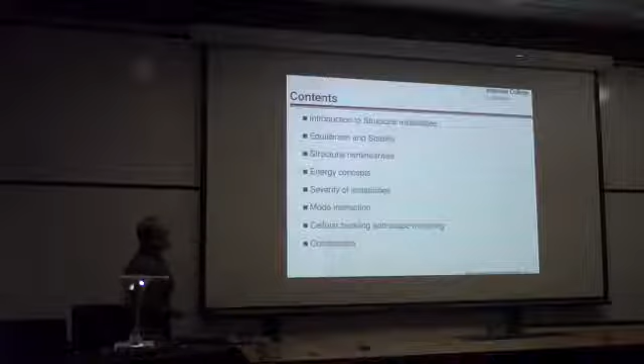So what I'm going to talk about: I'll give a brief introduction to structural instability, some examples, then we'll talk a little about equilibrium and stability. I'll try to keep the equations to an absolute minimum, so it's the facts of the talk that are important, not really the mathematics. It's also about structural nonlinearities, which are key to understanding these behaviours and where they arise from.

We'll discuss some energy concepts, talk about severity of instabilities, and then a little about how instabilities interact. Then we'll focus on some research topics - cellular buckling and shape morphing - and conclude.

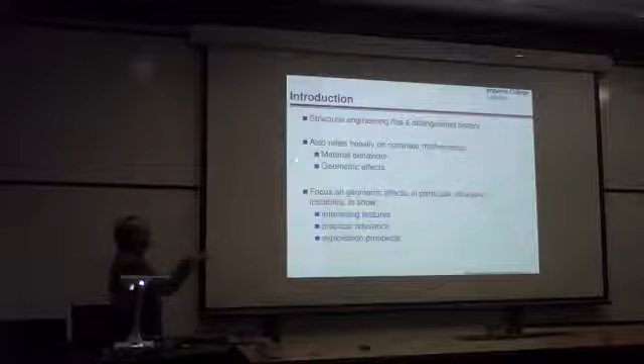Structural engineering has a distinguished history in its own right - it's a subject with its own literature, and we're working in a building right now, which is a testament to it. But it also relies heavily on nonlinear maths. The nonlinearities come from either material behaviour or geometric behaviour - when we talk about geometric behaviour, we mean things that deflect a long way. I'm going to discuss geometric effects today.

I will talk about material behaviour a little bit too, just to define it, but we'll mainly focus on geometric effects, particularly structural instability, which shows interesting features, practical relevance, and prospects of being exploited to your advantage.

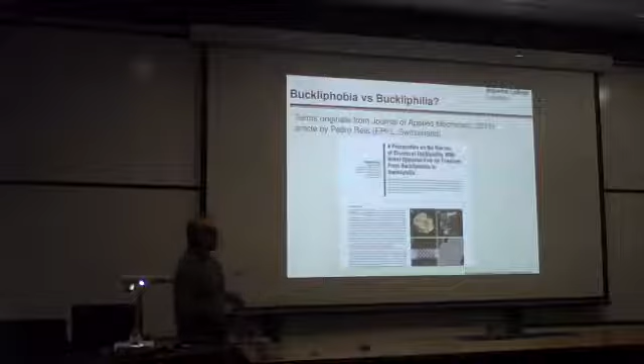So, Buckliphobia versus buckliphilia - I can't claim that title is original. I borrowed it from Pedro Reis at EPFL in Switzerland, who wrote a nice paper about 3 years ago in the Journal of Applied Mechanics, discussing applications where buckling is used to enhance behaviour. He's looking more at soft matter materials and shape morphing applications, not structural engineering, but at the small scale, where deformation from instability gives you something advantageous in practice.

So let's look at a classical example of instability. If you're a structural engineer, this is the first thing you look at - a column. There are plenty of columns in this room, you can see one there - probably can't see many more because they're not exposed, but there's definitely one there, supporting the building under compression. That one's probably concrete, but structural instability concerns things that tend to be quite slender and thin, like steel, which normally has much less volume than concrete because it's much more expensive.

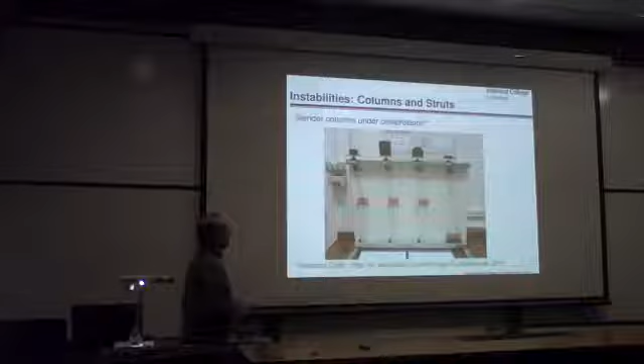But it's also much more strong. Anyway, so here's some standard columns under compression. If you apply a force here, there's some metal weights applying compression to this strut, and this strut is buckled. You can see it moves sideways from the original position.

If we change the boundary conditions, we get a different type of behavior. We actually get more load on the top there. I think this one has a clamp condition at the end here, where it can't rotate, but it can rotate here. So that gives you slightly more load than this one, but less than that one. And then if we have a cantilever, which is free at one end, see this can slide here, then it can only take a very small amount of load

Before it actually collapses. Those of you who travel by train, this probably doesn't happen in the UK very often, although it probably clearly does because it's a good excuse.

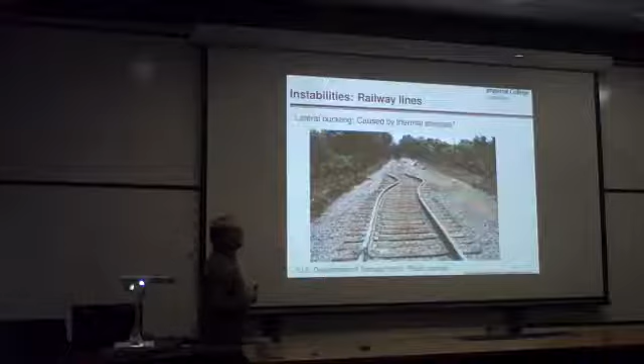But this is a type of buckling that occurs in railway lines where you get thermal expansion. Rails tend to be welded together these days. In the old days, they used to have expansion joints, but it's not very good for fatigue and things like that, so they weld them together. Normally they would put a big pretension in there before they place the rails, but if the pretension gets diminished over time, and you get a sudden heat gain, basically what happens is the rails try to expand. They can't expand because they're welded to the next rail, and they go into compression, and then they buckle.

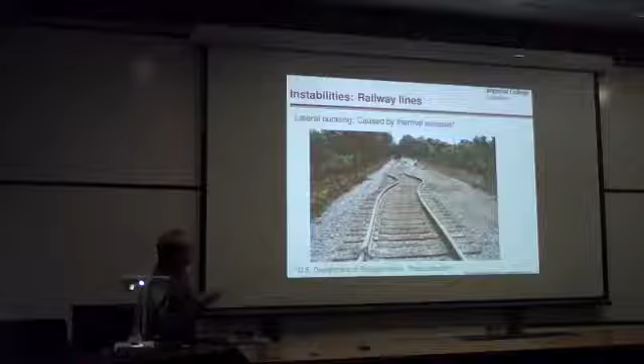But this is a sort of wood decking here, which has uplifted for the same reason as this one. In this case, it was allowed to move sideways. It was the easiest thing for the structure to do. In here, the decks can't actually move sideways because they're all clamped together. So the best thing that you can do is move upwards.

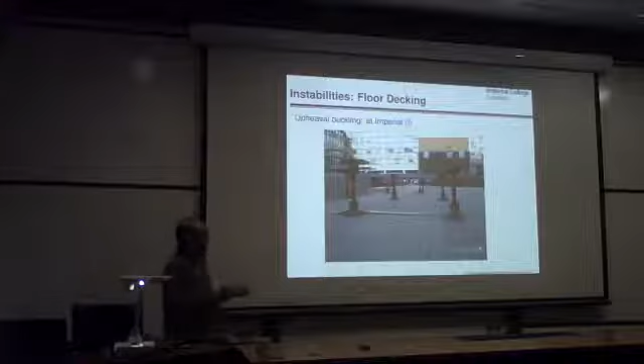So this was on a very hot day actually, in May 2005, quite a while ago now. It was about 32 degrees that day, but about 4 days before, about 8 degrees. So there was a lot of temperature change in a very short space of time. There's me with hair, a bit slender as well, probably, back in 2005. And just showing here, there's a little shadow of this tank here, and you can see that the distance of that is quite high, and these are large deflections.

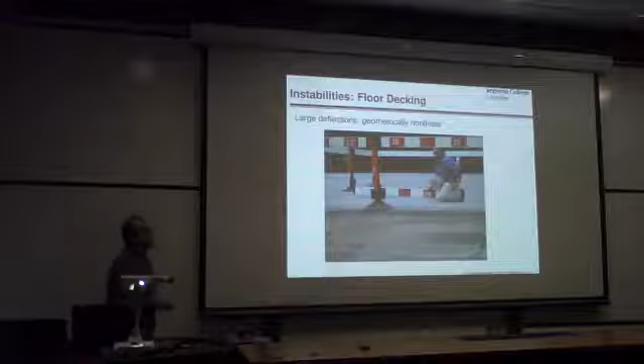Something in terms of these things, when we define it as large deflections, we think of deflections about the order of the element itself. So the decking elements would be about this deep as well, and you can see the deflection is quite of the same order. So it's called geometrically nonlinear. You can't make assumptions like sine theta is theta, and expect to get the same information that you would want if you wanted to model these large deflections.

Okay, so these were examples of very simple instabilities, but you can have simultaneous instabilities as well. I wanted to show you at least one video. I'll show you a few videos today. Let's see if this comes up. Let me just pause it for a second.

This is a video taken by me. This is a third-year project that our undergraduates do, where they have to build an aluminium beam and test for failure. It's a very simple setup. It's supported here, called a simply supported beam, which means it's resting here and it's resting over there. It's being pulled down here. So this chap here is turning this handle, which basically turns a screw, which pulls this down. There's a rod which is passed through the beam, and it just basically pulls it down.

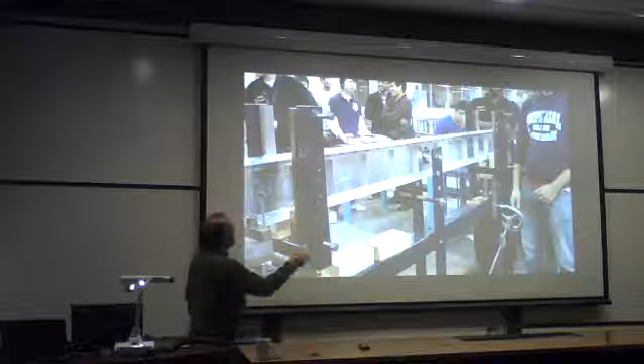It puts it under what we call three-point bending. There's a big point load coming in the middle there, and two reaction forces at the ends. These two points here and here stop the beam from displacing sideways, and the students are allowed to put that wherever they like. They're also given certain sizes of plate and angles and rivets to put it together and design to a particular load.

This wasn't a brilliant example, but they gave it a nice video. Okay, so he's about to apply the load, I'll just be quiet and keep watching this point here.

So when he applies the load, this thing will start to fall and this goes into compression. So you start seeing a natural sine wave coming in, or something which is a modulated sine wave.

Okay, and then what happens is the thing buckles, this buckles locally and then it buckles globally. So you'll see that it starts moving, starts twisting and dropping sideways. There, you can see, just pause it there.

Okay, so you can see that the back looks vertical, but this one is at an angle. You can see it's moved sideways as well. So this is an example of what we call mode interaction. I'll just play the thing again.

Okay, so in this case, the local buckling in the top flange there, the thin plate at the top there, then induces a global buckle into the main beam, and this is called mode interaction. It's a nonlinear interaction between the local buckling mode and what we call the global buckling mode, which in this case is a combination of lateral deflection and twisting.

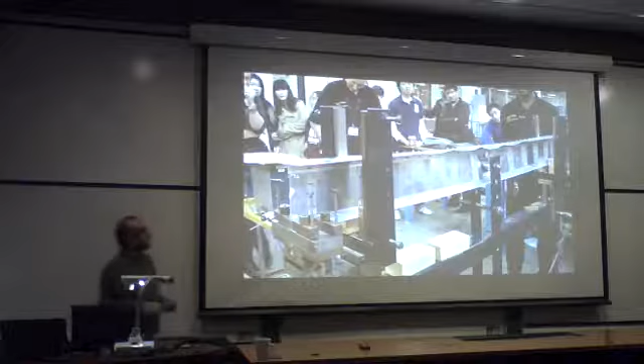Okay, so the global mode was lateral torsional buckling, which appeared at the end. Plate buckling occurred at the beginning. This is what we call local buckling as well. And this is an example of mode interaction. We'll return to a similar problem later when we look at some actual work that we've done at Imperial.

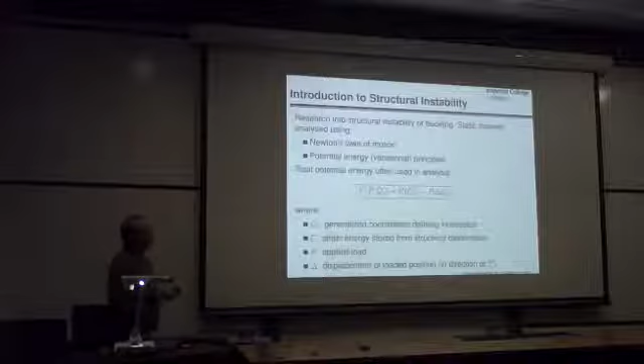So, what we're going to describe is research into structures with buckling. Static systems are analysed. We can analyze it from Newton's laws of motion, or we can actually, what we tend to prefer in structural systems problems, is to use variational principles or potential energy principles. It's a static problem.

So potential energy is often used in analysis. Here's total potential energy. It's a function of two things in this case: the applied loading and the generalized coordinates which define the kinematics of the system. So this can be decomposed into the strain energy, the elastic potential energy stored in the structure, and the work done by the external loads. So that's everything defined there.

So Qi is the generalized coordinate. We'll be plotting that against P, the load, quite often, and that's called an equilibrium diagram. We'll come to that later.

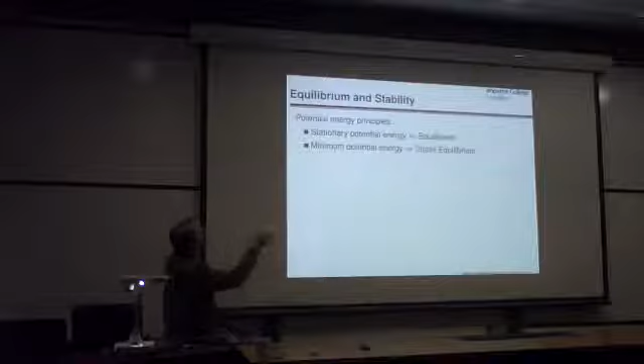Okay, so potential energy principles are as follows. We have stationary potential energy due to equilibrium, and minimum potential energy due to stable equilibrium. So that's some well-known energy principles.

And if we plot the energy function, any function V, let's say it's a function of just the kinematics for the sake of argument, and we plot one of the generalized coordinates here, we get a curve. So this is just an arbitrary curve here. The stationary points here define all the equilibrium states. Everything else is not an equilibrium, by definition of the first principle.

We can actually think of this energy function as a surface, as a physical surface. So let's change V to Z, this vertical displacement coordinate, and let's think of it as a surface with a ball on it.

So number one, this local minimum here, if we put a ball in there and we perturb the ball, it just sort of jiggles around here. So this is defined as a stable equilibrium. It's just at a minimum. So that's a stable equilibrium.

This is an unstable equilibrium because if we perturb the ball here, it would just go off somewhere and find another equilibrium state. Number 3 is also an unstable equilibrium, even though if we perturb it to the right, it would want to come back to the left, but then it would fall off and go off somewhere else. So case 1 is stable, case 2 is unstable, which is the maximum.

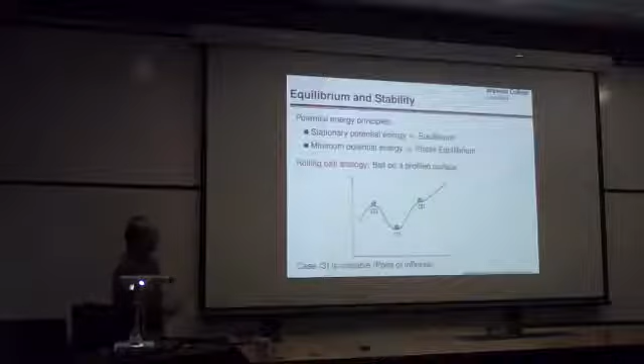So case 1 is the minimum, case 2 is the maximum, and case 3 is a point of inflection. A point of inflection also defines a bifurcation point, where the surface has a locally flat profile. In fact, its second derivative is vanishing for the function V. Okay, so that's by the way.

If we have more than one degree of freedom, so this was for one degree of freedom, we'd end up with a proper 3-dimensional surface. So we have a local minimum, local maximum, that would be stable, unstable, and we could have a saddle point, which is unstable as well, because it's a maximum in one direction and minimum in the other. So the ball, as it were, would want to fall off the maximum point.

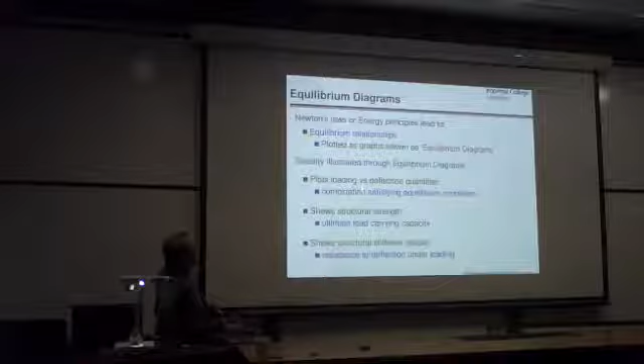Okay, so Newton's laws and energy principles lead to equilibrium relationships, and these are very usefully plotted as equilibrium diagrams. Basically, plots of loads versus deflection quantities, and the curve defines the combination that satisfies equilibrium. This diagram also shows structural strength, the ultimate load carrying capacity, which is useful if you're designing a structure, and it shows the structural stiffness, the resistance to deflection under loading.

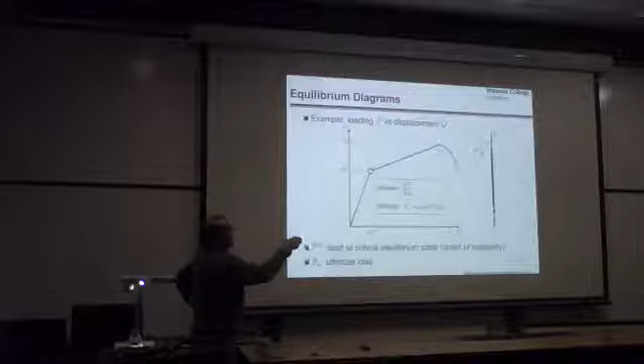This point is called PC, the bifurcation point, or the critical equilibrium state. This defines the onset of any buckling instability. Beyond that, before this, we start at zero load and end up at this point. This state is known as the pre-buckling state, sometimes known as the fundamental state as well. All of these states are in stable equilibrium.

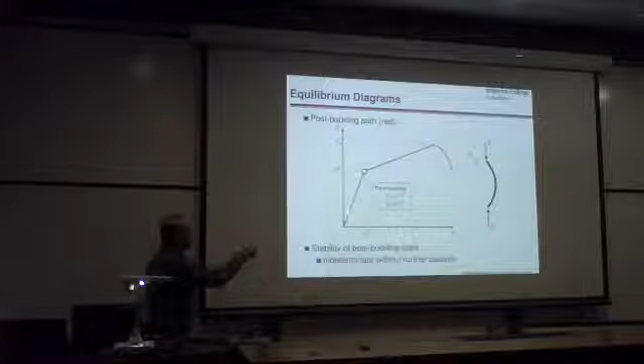After this point, we have a post-buckling state, which might be stable, might be unstable. This one would be stable up to this point here, but we won't go into too much. But basically, you have a post-buckling state, and you might get collapse at the end. So what I'm saying is that the stability of this is indeterminate without further analysis. This part is always stable, but this part might be stable, it might be unstable, but we can only determine this if we do some nonlinear analysis.

The slope of this curve, by the way, gives you the stiffness. So dP by dQ gives you the stiffness at any point on this graph. You can see it's positive here, a smaller value, positive large values, positive smaller value, and then it's negative here. And this point here defines the strength, PU, the ultimate load.

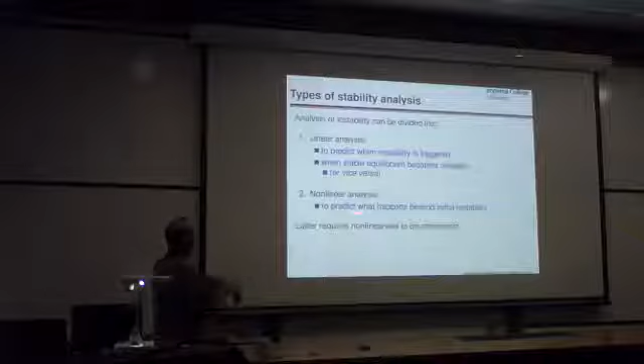So the analysis of instability can be divided into two parts. First, linear analysis, which predicts when the instability is triggered, this onset point here. That gives you this point, but nothing else beyond that. That is when stable equilibrium becomes unstable. Second analysis is nonlinear analysis. This predicts what happens beyond the initial instability. So this latter one requires nonlinearities to be considered, as you might expect for this analysis.

So where does nonlinearity come from? Well, nonlinearity in structures can be grouped into two broad categories: sources from the material or from geometry. From material behavior, we have the stress-strain relation, the so-called constitutive relationship or constitutive law. That plot relates stress, which is proportional to the applied force on a material, against the strain, which is proportional to its deformation and displacement.

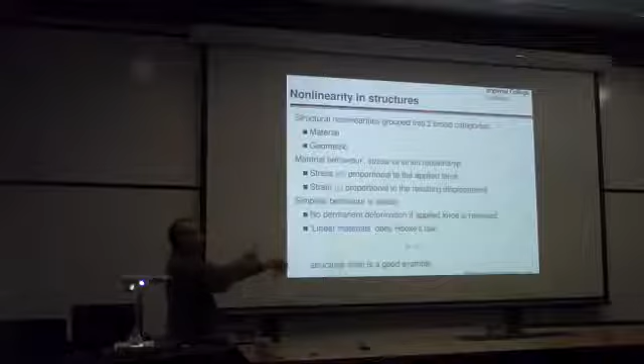So the simplest behavior is elastic. Like an elastic band - you stretch it and let it go, it comes back to its original shape. In that case, you have no permanent deformation. If the applied force is removed, there's no memory of the deformation it endured. And if we assume the material obeys Hooke's law, where stress is directly proportional to strain, we can simplify matters quite a bit. Structural steel is actually a good example of something which behaves very much like this. Lots of materials don't - they have elastic behavior, but not linear elastic behavior.

Structural steel is quite well behaved. If we take a structural steel stress-strain law, it looks something like this. This is the elastic range. It's very narrow in terms of the amount of strain, but it has a very high rate of increase of stress. The slope is given by the material's modulus. Once the material is in this range, we can apply the load, remove the load, and it has no permanent deformation.

Note that the elastic range is quite narrow, and this range can be nonlinear. If you had aluminium rather than structural steel, or a different alloy of steel, they would tend to have a curve more like that, more curve shaped rather than a straight line.

Beyond this point here, where it yields, defines the elastic limit, and we start getting nonlinearity. The material can be overstressed, and from this point there is permanent deformation. You will still recover the elastic part, but you will have permanent deformation enduring in the structure if the stresses, or strains, go beyond this particular value.

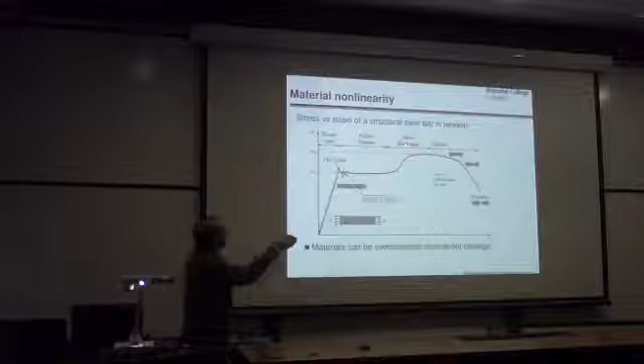So there are three ranges here. We have the plastic plateau in steel. We have a region of strain hardening where the stresses increase. And after the point of maximum stress, we have the onset of failure, and eventually fracture - the whole thing snaps. The material is fractured at the end. We're assuming here there's something under tension.

In terms of structures, what do we mean by geometric nonlinearity? Here's a plate, just a cartoon of a plate, with a defined deformation. This W is a lateral deformation. Let's say this thing has a very small thickness.

If we wanted to work out the strain in this plate, it's defined by the in-plane displacement, which is U - that's the first partial derivative with respect to x. We have a second term relating to the out-of-plane displacement, given by half of dw/dx all squared. The first term is to the power 1, so it's linear. This second term is to the power 2, so it's quadratic, and therefore nonlinear.

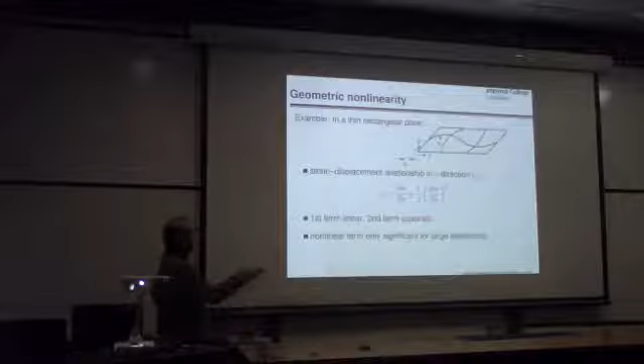Because the deflections normally start from zero - it's probably perfectly flat to start with - this linear term will dominate first, and then once w becomes relatively large, this nonlinear term will start to dominate. So this nonlinear term is only significant for large deflections, and it's this term which gives you the information for what happens after buckling is triggered.

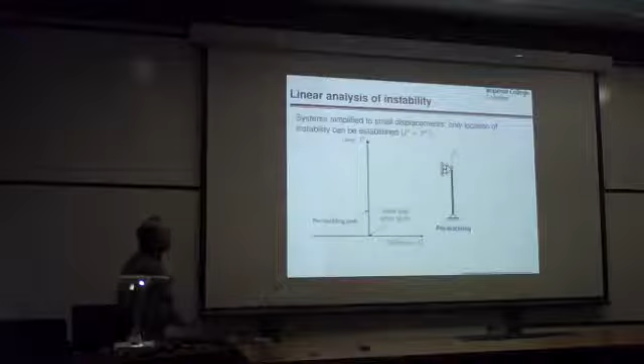Going back to linear analysis: systems simplified to small displacements can only establish the critical buckling load, known as PC. If we look at the equilibrium diagram, we have load P and deflection Q. Before any buckling occurs, the deflection is now lateral rather than vertical. Initially we get a pre-buckling path straight up the P-axis, because there is no deformation theoretically for a perfect system before it buckles - otherwise it would have been buckling.

Once it does start to buckle at the onset of this load PC, we get an increase of displacement Q. If Q deflects to the right, that defines a positive value; if it deflects to the left, it defines a negative value - it's just a measure of amplitude. However, because it's linear analysis, what you get is a post-buckling path which is perfectly flat. In reality, of course, that's not true, so this can be very misleading. The flat post-buckling path is purely an artifact of this linear assumption.

We've assumed small deflections, so we can only get the value of the critical load and nothing else beyond that. You might think that's fine, at least you get some information, but the problem is some systems behave like this, like columns - but other systems behave completely differently, with qualitatively different post-buckling paths. Nonlinearities control whether the component is stable or unstable after buckling. This implies it's sort of neutrally stable - it loses stiffness, but it can hold the particular load defined at PC.

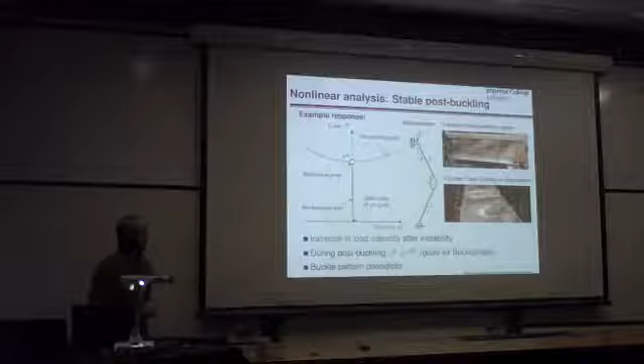In reality, we get something like this. We could have stable post-buckling. For those of you who are au fait with bifurcation theory, this is a supercritical pitchfork. We have the fundamental path, the pre-buckling path, which is stable, and then we have a bifurcation point, and then a post-buckling path where the path is above the critical load PC.

Here's an example of a system that behaves like this. We have a load here, this is a rigid link system, and we have a rotational spring of stiffness C, and this would be the rotation here, Q. In real systems, a plate, a web in a beam like so would be very stable in post-buckling, as would the flange like we saw in the video earlier.

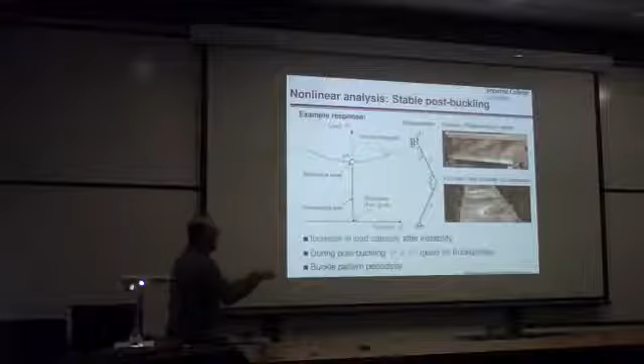So in this type of system, we have an increase in load capacity after instability. The system can carry on taking more and more load after the instability is triggered, even though the stiffness has dropped, but the stiffness is the slope of this curve. The post-buckling has gone beyond the critical load, so it's good for people who like buckling, good for buckliphiles.

Another feature of stable post-buckling is that the deformation shape tends to be distributed or periodically distributed through the length. That's one of the signatures we can spot - if we see something that is periodically distributed, we know pretty much that it's going to have a stable post-buckling profile.

Now, these can actually fail once the material fails. The stresses and strains get very large in these large deformations, and eventually they reach the yield stress, as shown earlier, and then you get failure. But in the elastic range, they will just carry on increasing load.

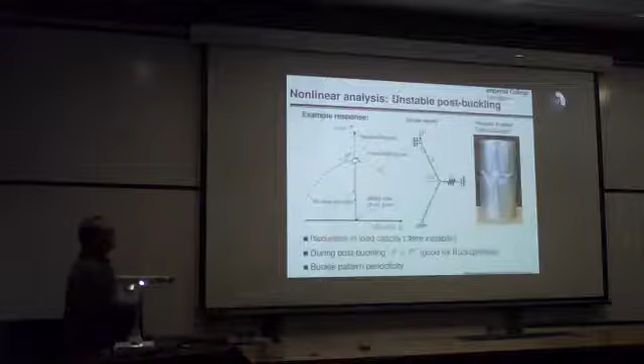Conversely, we could have an unstable post-buckling response. This would be a subcritical pitchfork bifurcation. Pre-buckling path same as before. Here's the system - this time, instead of having a rotational spring, we have a longitudinal spring, and that changes the behavior substantially. Now the post-buckling path goes downwards. All the nonlinear behavior is below PC, hence it's called subcritical.

There's a reduction in load capacity after instability. During post-buckling, the load is less than critical load, and this is good for the people who are scared of buckling. A typical example of this is a cylindrical shell - it's a very well-known example, studied very extensively because it has this rather unstable behavior, and it's very difficult to predict its actual failure load to any degree of accuracy or reliability.

Another feature of unstable systems is that, unlike stable systems which are nicely distributed in terms of deformation, these are very much localized. Although the cylinder has a sort of periodicity along the circumference, it has a very much localized deformation along the length. This is loaded under axial compression.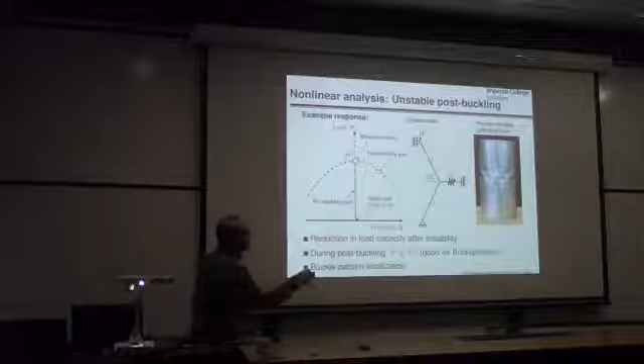So what we've talked about so far is systems which have a pre-buckling path, basically, which is up the P-axis where no deformation occurs in terms of lateral deformation before any buckling occurs. So what we call those are perfect systems. What happens if you have an imperfection?

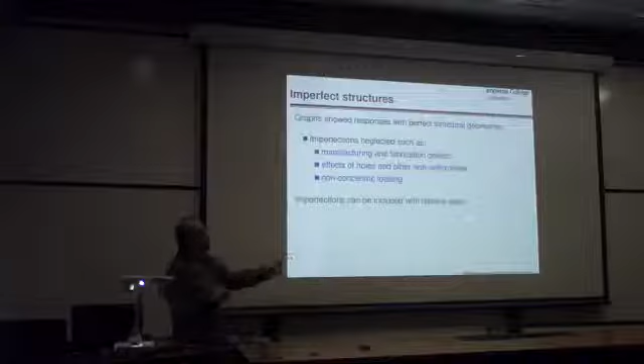So we've neglected them so far, but imperfections obviously exist - manufacturing and fabrication defects. If you're making steel, it cools at different rates in different parts of the steel, so it doesn't actually stay straight. It might be within manufacturing tolerance, but it will have some sort of out of straightness.

It's just a straight element - it's supposed to be a straight element. If you're joining things together, you weld things together. If it's a metal, you get heat affected zones, and you might have holes in them for connecting them with other elements and so on.

And you might have more eccentric loading. Here, we've assumed everything is sort of axial - in other words, the load is applied perfectly along the center of the axis of the initial shape, where in this case Q would be 0.

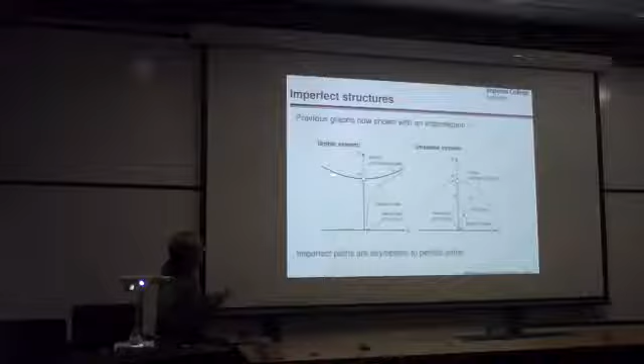So these imperfections can be included with relative ease, and they actually change the equilibrium diagrams quite substantially. So for the stable system, the imperfect paths are asymptotic to the perfect paths - you can see here, it's asymptotic. This is the imperfect part, the perfect part of the stable system, and similarly for the unstable system.

So for the stable system, it can be loaded as I suggested before - the imperfect path goes past the bifurcation point, and carries on loading until the material is overstressed, and then it will actually stop and curve over and fail, becoming unstable.

The unstable system actually fails over a maximum well below PC. If I have cylinders, the PL value here could be 20% of PC, and that's for a very good cylinder. So these imperfections can be shockingly severe in their effect. The unstable system fails in the elastic range before it reaches the bifurcation load.

Epsilon, by the way, is the imperfection size, and that's the initial offset of the model that we showed earlier when the loading was first applied.

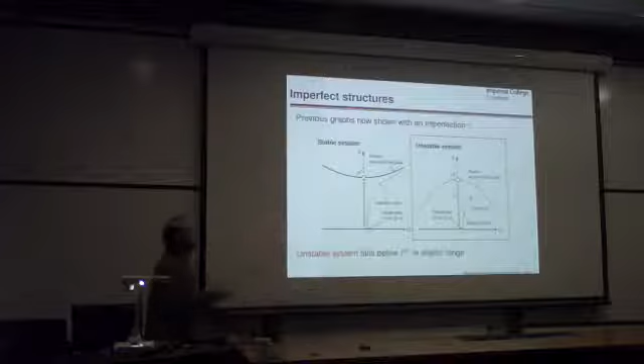If we plot a locus of this limit point load against the corresponding imperfection, we get a graph like this: PL over PC, the limit load divided by the critical buckling load, against the imperfection size. We get a 2/3 power law for this type of unstable system: 1 minus alpha, where alpha is a constant relating to the particular system. This 2/3 power law isn't a curve fit, it's an actual mathematical law, a power series law, so you can get other terms if you increase your analysis, but to leading order, that's the term you get for this type of system.

So the actual capacity drops away very quickly with the imperfection. And there are different power laws for different types of system.

Just need to do the analysis of that, just an example.

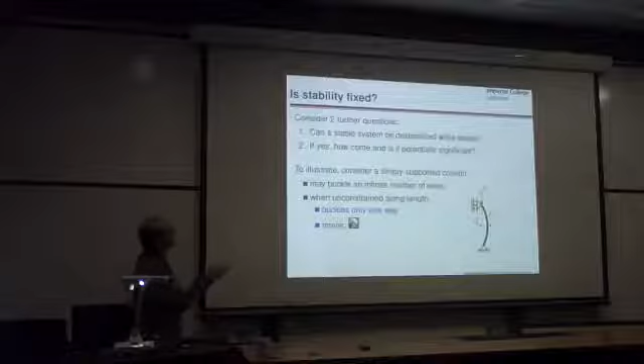We've looked at very similar instabilities so far, a stable and unstable system. There's also an asymmetric system which I don't want to go into, but it exists as well. But is stability fixed? Let's consider two further questions: can a stable system be destabilized while it's elastic, and if yes, is it potentially significant? I hope you'd say that one is going to be yes, otherwise this would be a very boring talk.

Let's illustrate this with something called a column. We've seen this a few times already before. A simply supported case means it's free to rotate here and here, and free to displace vertically here, with its load directly above the support here. So this may buckle in an infinite number of ways.

Infinite number of ways - and an infinite number of waves as well, but that's one. But when it's unconstrained, it only buckles one way.

Let's have a look at a movie.

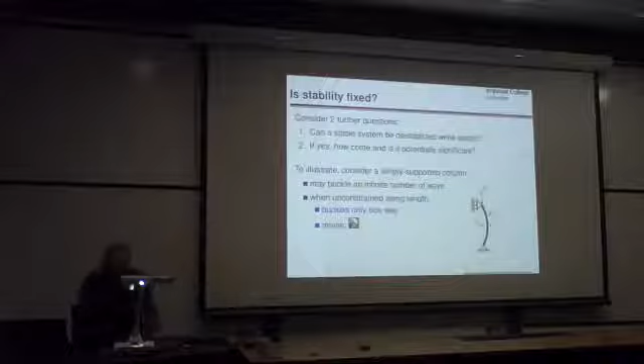This is one of my students who's very kindly helping out - you can see him in the background there with my striped shirt on. He's applying a load. In this case, it's actually fixed at the end, so it's clamped. If we look at where the supported bits are, it's basically from here to about there. He's applying a displacement rather than just putting a massive force on it, using a screw jack, and he's turning the handle, and the thing basically starts to buckle.

It will always buckle in the same shape here. This should be a full sine wave in this particular case, but because it's a lightweight, slender structure, it's also affected by self-weight. But it should basically get a full sine wave for that particular case.

Let me just play it again. He's going to load it up - you'll see it starts to buckle. And then we take the load off, but it's still elastic.

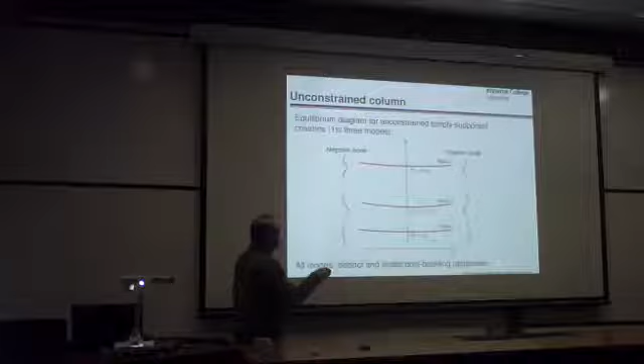But if you're starting from zero load and zero deflection, the first thing we encounter is this first bifurcation here, and it will buckle that way all the time. It's a bifurcation, so you can have deflection to the right or to the left. In a perfect system, it has equal probability. All modes are distinct, nicely far apart in terms of load, and they have stable post-buckling responses as well.

Let's consider a slightly more constrained column. Let's put a spring at the middle of this support. This is connected here, free to rotate at this point, but there's a spring connected to some sort of external support. So when this thing deflects, it compresses or tenses the spring.

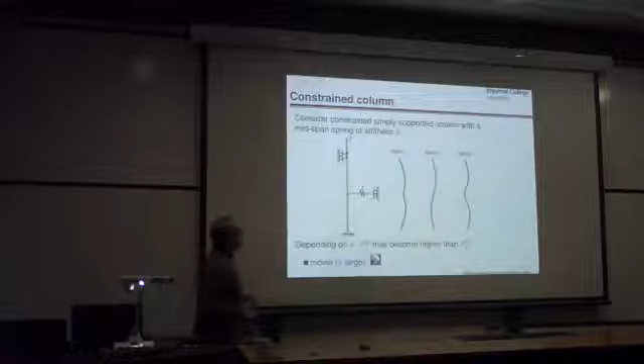Now, there's a possibility that if we have mode 1, this will be constrained at the midspan, so there will be resistance to that thing deflecting at the span. It might trigger mode 2, it might even trigger mode 3. Let's have a look what it does on the video.

Pause it there - okay, so now my student has grown another hand, and he's going to apply the load again, but this time we've got a very high-tech pen to stop it from moving. This is effectively, from that diagram, K was the stiffness of the spring - this would effectively be K being infinity, so large that there's no deflection possible at the span. Let's apply the load now. So by introducing the constraint, we've actually caused the mode to change.

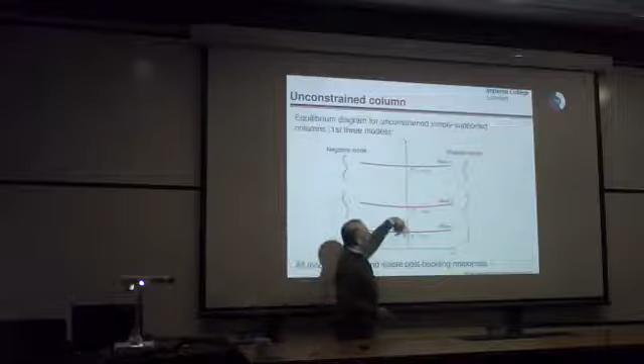So depending on K, the critical buckling load for mode 1 (PC1) may become higher than that for mode 2, and therefore mode 2 would become critical - this would become a higher mode, so basically they swap around. What happens if the two critical buckling loads are the same, or very similar? This is a cusp of the buckling mode changing, and the post-buckling can be adversely affected if mode 2 is triggered in the presence of mode 1, or vice versa. Post-buckling may transform from stable to unstable, and these secondary instabilities are likely, causing mode interaction or so-called interactive buckling.

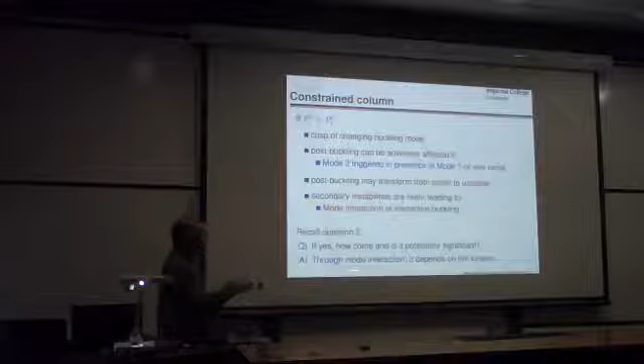So if you recall question number 2: can a stable system be destabilized elastically? Yes. If yes, how come? It's potentially significant through mode interaction, and of course it depends on the system - it could be dangerous if you don't want buckling, or it could be good if you want buckling to occur for whatever application.

So just to explain what's happening in mode interaction, another sketch of an equilibrium diagram: this is loading. Mode interaction, of course, requires more than one mode, so we now need 2 degrees of freedom - we have Q1 and Q2 defining the size of mode 1 and the size of mode 2. Let's say we have a stable post-buckling mode in Q1 only.

If we have something destabilized by a secondary interactive mode, we could have a secondary instability occurring. So let's go back a second: we have 0 load, we apply load, we get to bifurcation, and we have a post-buckling path which might just be triggering mode 1. But let's say we're having a secondary instability, which is triggering a second mode, a mixture of mode 2 and 1 - this is just a shadow of this thing here.

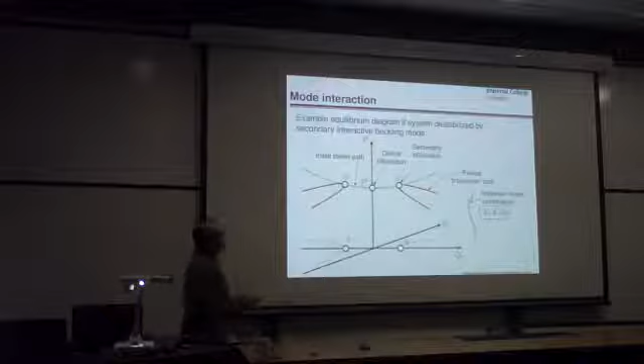Okay, so it reaches here, let's say it follows this path, and then hits a secondary instability, we'll call that second bifurcation S, and now it follows a spread path, either here or there. So now, instead of just buckling in mode 1, it's buckling in a combination of mode 1 and 2. But the worst thing is the load is dropping off, so load carrying capacity is actually reducing.

So if these coincide, we have the possibility of instant collapse. And these are the sorts of things that give nightmares to structural engineers and make them buckliphobes.

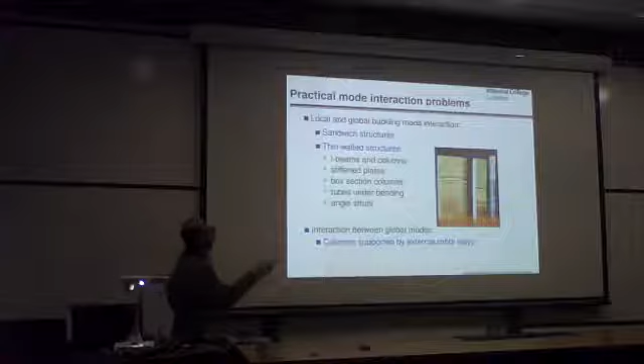So some practical mode interaction problems, ones where local and global buckling modes interact. My PhD was on sandwich structures—there's a couple of samples from some experimental work that I did. Then, more recently, we looked at work on thin-wall structures.

Next, that picture from that beam again, that movie again. This is a beam in bending. This is a beam in compression. This is not ours—this is a photograph from colleagues of mine at the University of Sydney, Professor Kim Rasmussen and Dr. Jurgen Becque, from Jurgen Becque's PhD project. It's a stainless steel I-section, just under compression, and we see here the flanges, both flanges, and the web buckling under compression.

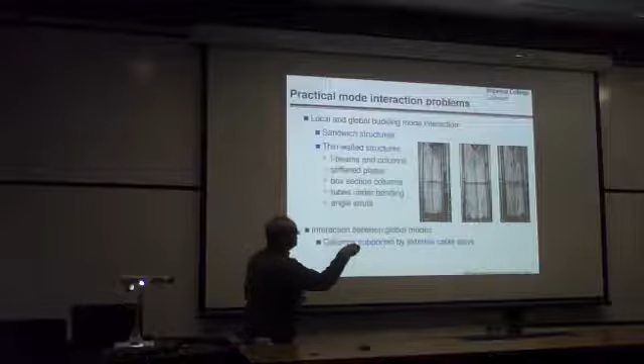And finally, we look at—we won't actually discuss this in this particular talk—interaction between global modes as well. This is a cable-supported column. These cables are pre-stressed. Basically, what happens is you get an external support in the middle here, and it's very much like those two videos I've just shown you, where you've got an external support stopping the midspan from displacing.

So, normally, as structural engineers, we're very fond of numerical methods, particularly the FE method. However, the FE method is not great for instability problems. Although FE is brilliant at pre-processing, meshing, and post-processing—all very good—if it has a nice, smooth response then it's fine, but if it has a discontinuous response, like bifurcation, it can be quite awkward to use.

You can get around these things by introducing carefully crafted imperfections to get the behavior that you're expecting, but it's a little bit unsatisfactory. So the question arises: we put in some sort of imperfect behavior—which coexisting equilibrium states after buckling are practical? And it's less obvious when we have these mixed mode interactive buckling problems.

So solving by FE for the imperfect structures analyzed—there's a problem, another problem is it's quite inefficient in terms of the study, because you have to consider all different combinations of imperfections that you might put in. And if you're slightly careless with your selection of imperfections, it may result in unsafe strength predictions, which is not good if you're a designer.

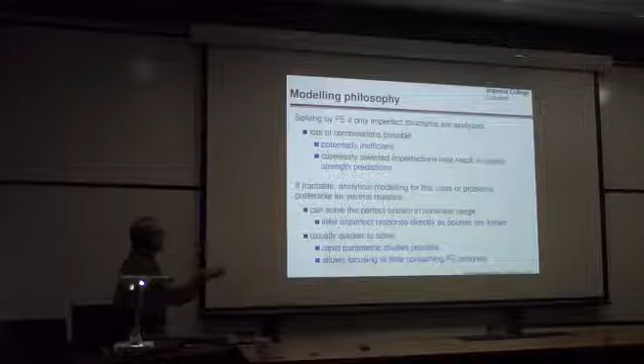So we solve the perfect system in the nonlinear range, and then you can infer the imperfect response as the bounds are known, because we know that the imperfect responses are asymptotic to the perfect response. And they're usually quick to solve, so it allows you to study lots of different combinations of, say, geometries, and allows focusing on more time-consuming FE analyses.

So, modelling structures can lead to highly complex sets of nonlinear equations—algebraic equations for discrete systems or differential equations for continuous systems. So what we tend to use is the appropriate numerical method to obtain quantitative results. If we have a series of nonlinear differential equations, we've tended to use the numerical continuation technique in AUTO, sometimes in MATLAB as well, and if we have algebraic equations, we sometimes use a symbolic computation package.

For model validation, we've used the nonlinear FE code ABAQUS, and if we have the funding, we sometimes do experiments as well. I quite like experiments, so they're good fun.

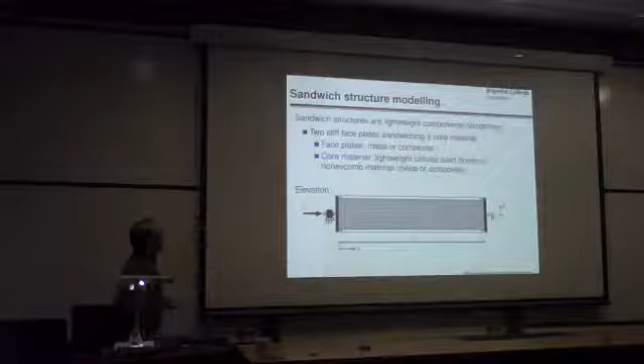Just looking at sandwich structures—sandwich structures are lightweight components comprising two stiff face plates and then softer core material. This core material is usually something like foam or an aluminium honeycomb or something mesh-like or foam type, and the face plates are solid, normally something like a steel or aluminium plate, or maybe even a carbon fiber composite.

And they're only glued together, or they are welded together if they were aluminium, but less common.

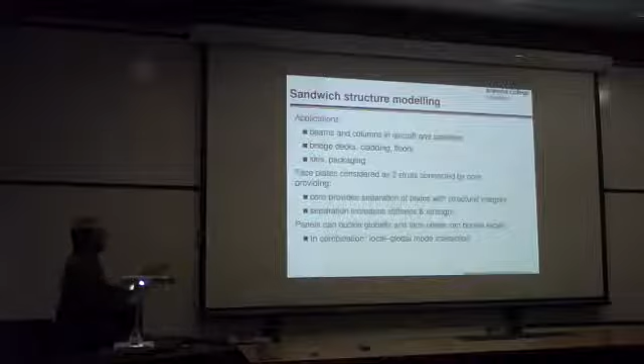They're applied in various different things, particularly in lightweight structures like aircraft and satellites. Sometimes they're increasingly used in bridge decks as well, where you have very long spans and you need minimum weight. They're often used in cladding on buildings and in floors, and often used in sports equipment as well, because weight is very much of an issue, and packaging. So skis, for example, are sandwich structures themselves.

So faceplates can be considered as two struts separated by a core. The core provides the separation of the plates. Effectively, if we don't have the core, then this thing just behaves like a very thin strut. By putting the core in there, it behaves like one structure, and the depth of the structure gives you the extra stiffness. The separation of the two plates gives you the increased strength and stiffness.

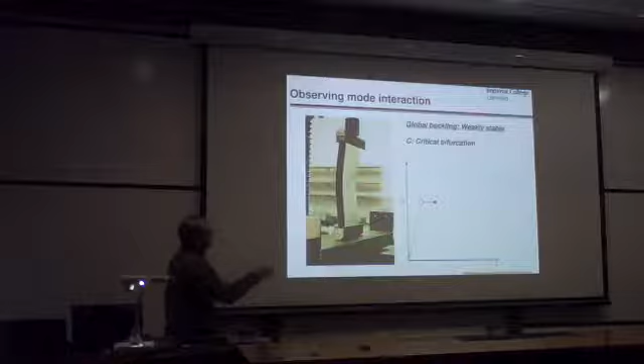We apply the load, no buckling, linear elastic response. Delta is the vertical displacement here. When we apply the load to such an extent that it buckles, we have a critical buckling load - this is the critical bifurcation - and then we get a modest rise, we don't get much rise in the load. Let's say it's completely flat, basically it buckles in this half sine wave. Then we get secondary buckling, we get a thinning here, we get global buckling being triggered, and then we get a sudden drop off in the load. So C is the critical bifurcation, S is secondary bifurcation, and we look at different cases for those particular geometries.

In terms of modeling this, the global mode is very well known to be a half sine wave, so we impose that as a condition. This allowed us to simplify our model such that it became tractable mathematically.

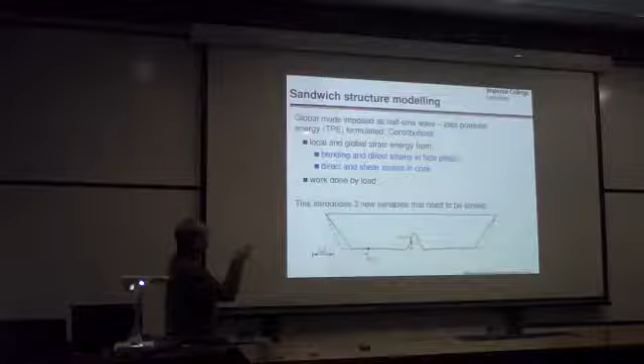To calculate the total energy in this thing, we need to calculate the strain energy stored in the local and global forms for the bending and direct strains in the faceplates, and the direct and shear strains in the core. We end up with a quite long expression. For the work done by load, we minimize the total energy and get a series of equations in particular quantities.

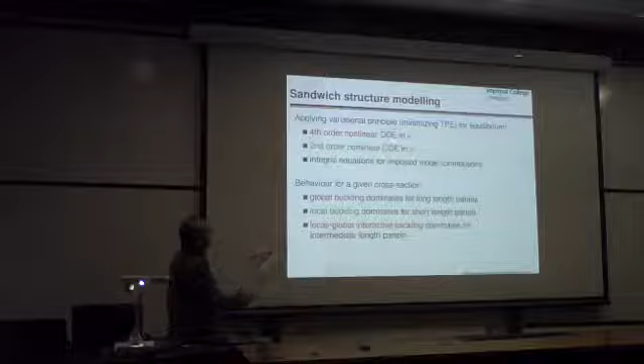We have the out-of-plane displacement of the faceplate shown there, and the in-plane displacement of the faceplate - not easy to see that in the picture - and we have the end displacement. We end up with a fourth order nonlinear differential equation in W, a second order nonlinear differential equation in U - it's all really differential equations. We assume it's a 1D problem, things are not really happening in that dimension, it's just basically cylindrical buckling.

And we have integral equations for the imposed mode contribution - this is purely a function of the fact that we're imposing this half sine wave as the global mode first, so behavior for a given cross section. Global buckling dominates for long length panels - if we make it very long, global buckling would occur and local buckling would really not. If we made it really short, you have local buckling only and no global buckling. But for an intermediate length panel, you get this interaction quite strongly.

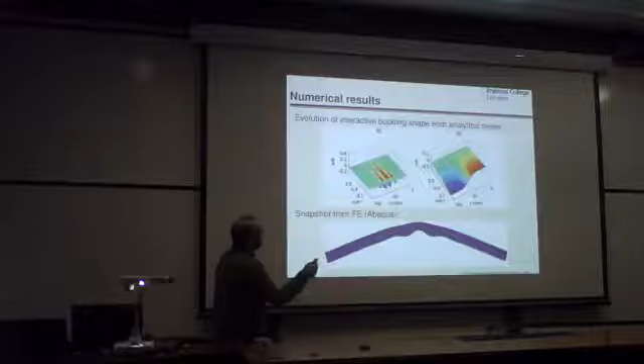This is U, the in-plane displacement, and this is the snapshot from Abaqus, the finite element model, showing the faceplate here, the faceplate on the other side, and the core material as well. The comparisons between the two were very good.

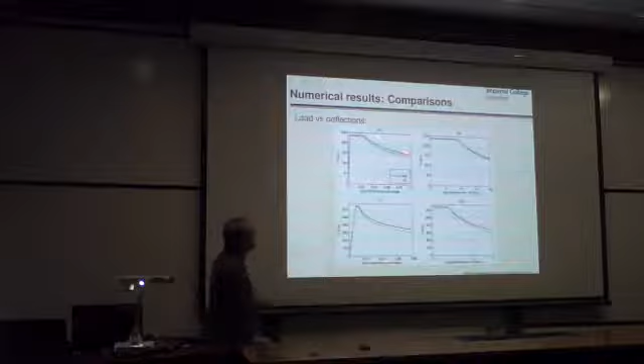So very encouraging results. Further work on this has been done.

How am I doing on time? Maybe just over 5 minutes. Right, fine, I should be okay.

We have extra comparisons obtained quantitatively from different relationships. I won't go through all of these, apart from the fact that the latter one, nonlinear core relationships, led to this thing called cellular buckling. That's what I'll talk about next.

So snaking or cellular buckling, essentially the same thing. Mathematicians like to call it snaking. We call it cellular buckling because what happens is effectively a sequence of buckles triggered in cells. So we have this cylinder.

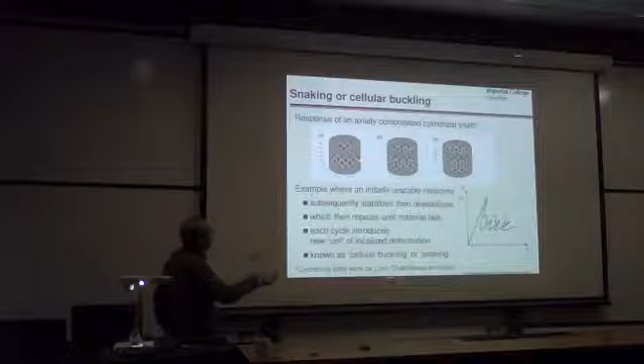This is work by Lord, Champneys and Hunt - Alan Champneys from Bristol, Greg Lord from Heriot-Watt, and Hunt from Bath, my supervisor. This is an initial buckle of a cylinder. If you apply more end displacement, you end up with a second row of buckles; apply more displacement, we end up with three rows of buckles.

This has manifested itself in a sort of snapback. The first bifurcation has a big snapback, then a second snap with the second cell, and the third cell and so on. This is an example of a system which destabilizes - it goes up and comes back down, then restabilizes, comes back up again, and then it reaches up until the material fails.

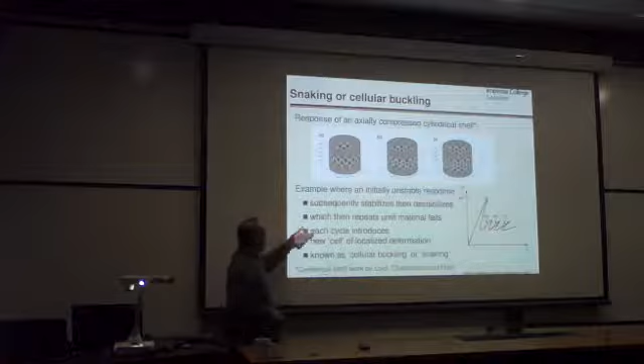Each of these snapbacks introduces a new cell with localized deformation, shown here, known as cellular buckling or snaking.

This is an example where you can use buckling to your advantage. In mechanical engineering, for example, the crumple zones in cars, which absorb energy, basically trigger this type of behavior. If we simplify that picture, we have this up and down behavior of the equilibrium diagram.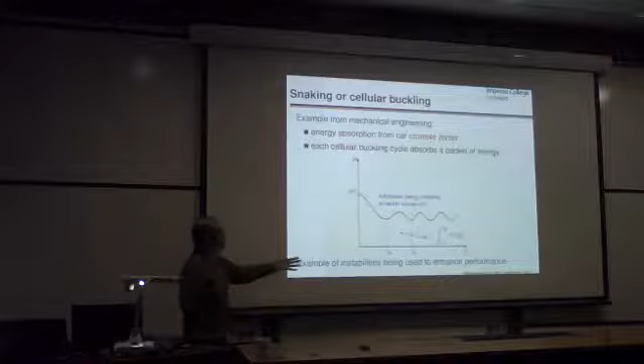Each cell here is associated with an amount of energy - the integral between this point and that point would be the amount of energy that needs to be triggered, that needs to be absorbed, that needs to be overcome before it buckles.

This would protect, for example, the passenger from an impact. You would have that amount of energy, that amount, and that amount, and so on in sequence, and that can be used to your advantage.

We found this also in thin wall beams. I'll run through this quickly - more conclusive evidence found in thin wall I-beams, under bending. This is a test system here, here's the beam being tested.

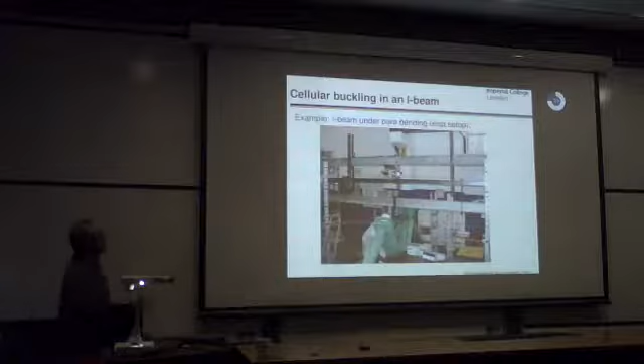This is the test setup. The beam is under 4-point bending. This is the load here, pulling it down, and so on. We found this thing buckled globally, then it buckled locally, and then it buckled locally once more.

So that was found - a similar type of model, a 4th order differential equation with a 2nd order differential equation, the out-of-plane and the in-plane displacement as before.

The numerical solution in AUTO again shows moment versus displacement, the amplitudes, and the deformed shape. Here's the equilibrium path with these snapshots shown. This is moment against lateral displacement, and this is out-of-plane displacement amplitude against the lateral displacement. You can see the snapshots going up and down, up, down, up, down, so we have destabilizing, restabilizing, and so on.

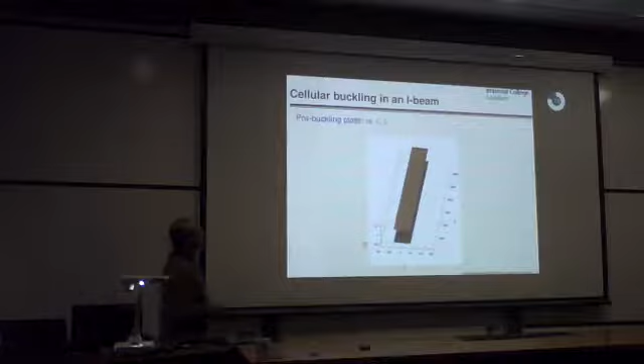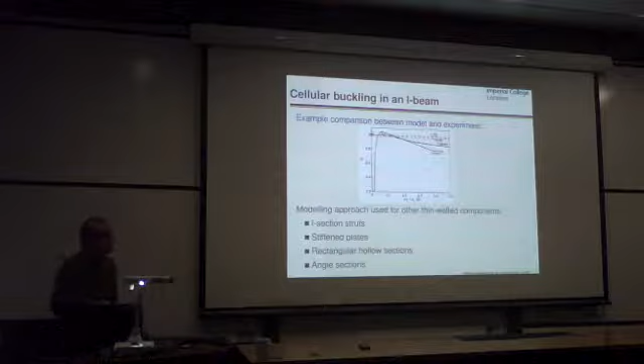So the modeling approach has been used for other thin-wall components, like I-sections. It starts with a beam under bending, going under compression. We have stiffened plates, which are commonly used in bridges and airplane wings, rectangular hollow sections, and more recently we've been looking at angle sections. These are very awkward because they have a nasty habit of having the centroid and shear center in critical locations, so it's not really nice in the model.

Okay, finally, to wrap up, cellular buckling also appears in natural structures. This is Millook Haven in Cornwall, near Bude, on the north coast, where it has this very chevron folding. We did some work a long time ago looking at what happens if you take layers and compress them.

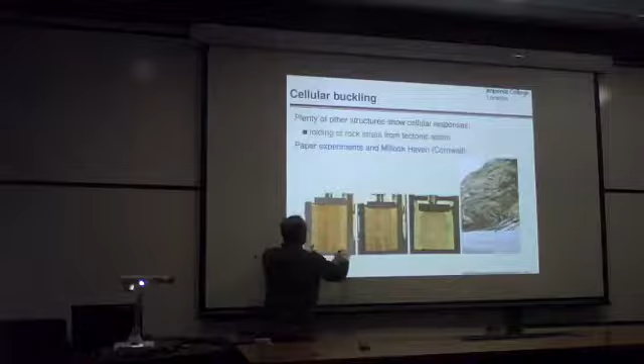What's shown here is a load of paper with two foam layers, which are laterally compressed, laterally strained, and then we apply an axial load. We first get what's called a kink band, which then propagates all the way down. The bands broaden and then join together. This is all one experiment, showing different stages, and we end up with something which looks remarkably like that.

Here's another experiment with a much softer boundary - this one here is quite stiff. If we have a much softer boundary, we get something slightly different, which is when there's a parallel fold.

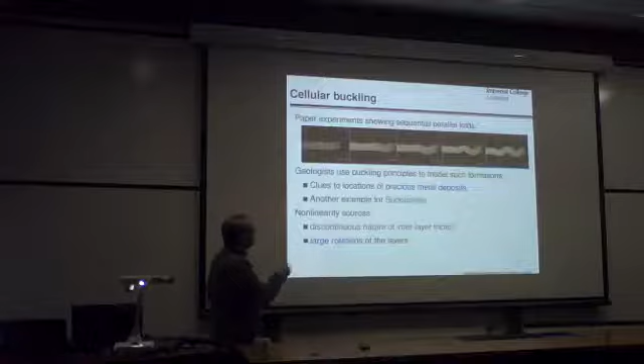Now, the thing about these folding behaviors is that you get voids forming, and these are places where geologists would search for precious metals. So when we get folding and voids forming, there are crucial locations for precious metal deposits or mineral deposits - another example where buckling is actually a positive thing rather than a negative one. This nonlinearity is due to the discontinuous nature of the friction between the layers and the large rotation of the layers.

Here's an example - this is probably almost my final slide now. This is a colleague of mine in Bristol, Ahmer, who showed me this nice picture. I've got a video of this, I've silenced it at least. So what this is, is a flap in a wind tunnel.

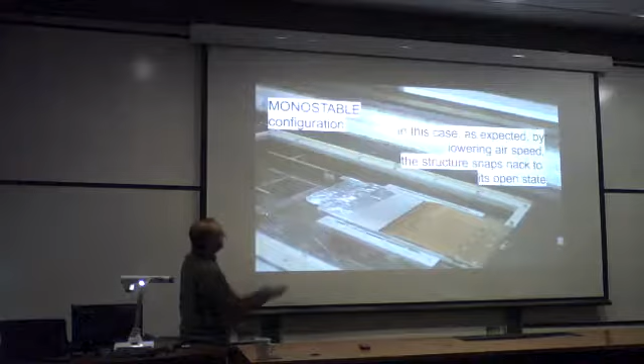When the wind is applied, by increasing the airspeed, the monostable inlet snaps into its closed state, and when you reduce the load back, it opens up again. So there's a lot of air going over here. As the airspeed gets to a sufficient value, this thing closes up, and when the airspeed reduces again, it opens up again. This thing is nice and elastic - it doesn't get damaged during this deformation, so it's buckling used to your advantage.

Okay, so the typical equilibrium diagram for this would be something like this. Here's the airspeed, which is proportional to the force, and the displacement of the flap of the inlet. This shows the open region, the transition region where the thing is closing, and this is where it's closed. This is the equilibrium path - as the airspeed increases, once it reaches this point here, it's not stable anymore, so it has to jump over to the other branch.

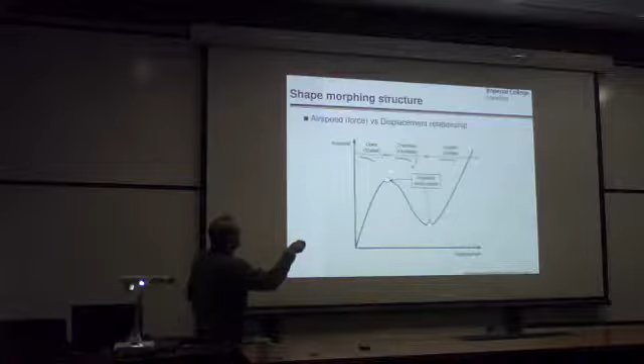So there's a dynamic transition from open to closed. Then, as the airspeed reduces, it comes all the way down, and then there's another dynamic transition from closed to open. So there's an idea of what we call instability, I suppose. This is where shape morphing can be introduced from buckling.

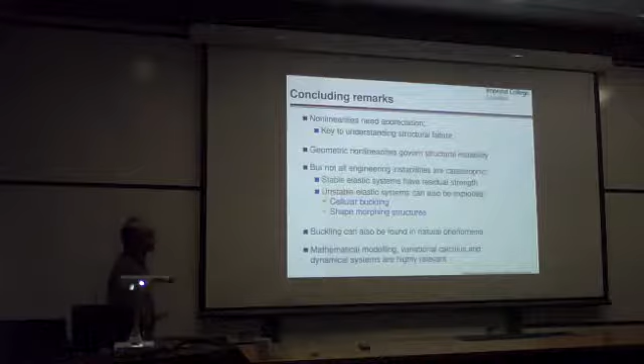Another example of helpful instability. So, some conclusions on nonlinearities. Nonlinearities need appreciation; it's key to understanding structural failure. Geometrical nonlinearities govern structural instability, but not all engineering instabilities are catastrophic. Stable elastic systems have residual strength. An unstable system can also be exploited through the cellular buckling phenomenon, or this sort of shape morphing structures, and there are various other things which I'm not mentioning. Buckling can also be found in natural phenomena, and there it can be used in a positive way as well. Finally, mathematical modeling, variational calculus, and dynamical systems are all highly relevant to this type of research and practice.

So, acknowledgements - just to acknowledge some of my colleagues. Leroy Gardner was a very close colleague of mine at Imperial, and Giles was my supervisor. Mark was the postdoc before me on that project on geological folding, long time ago - he's now a professor. And some of my former researchers: Levi and Jiao Shen, who were looking at thin wall structures, and Stelios, who did later work on the sandwich panel. So, some source articles - all these papers have been mentioned in some way today. And the image acknowledgements are for the film.

Thanks to Jürgen, to Gabriel, and to Jessica. And that's it. Thank you very much.

You did indeed - and I never knew there was so much to do with buckling, good or bad. As Emma said, we've gone slightly over time, but we probably have time for just a couple of questions if everybody has a couple of quick ones. Anyone have a question?

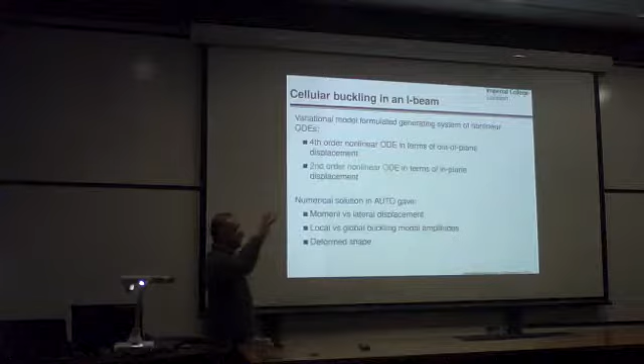I just have one - thank you. You mentioned quite glibly that these things deform into sine waves, but a couple of those deformations didn't actually quite look like sine waves. Which ones are you talking about? The ones in - well, something like the MATLAB thing you just flicked over, where you showed the beam - your students right at the beginning were deforming a beam. You said that's a sine wave, but it sort of didn't look like one. Well, it's not quite a sine wave. If the local buckle is purely a local buckle, it would be a sine wave, but the thing is, it's bending as well.

So the stresses are actually increasing towards the middle, so the middle one would actually be a modulated sine wave, or a damped sine wave more than anything. So you have the maximum displacement in the middle, and it would be growing, and then diminishing again.

Just one more question, quick - go on, Nick, and then we'll finish. So when you talk about how different modes can be excited and such, is there a rate dependency on that? So how quickly you load it depends on which mode would be excited?

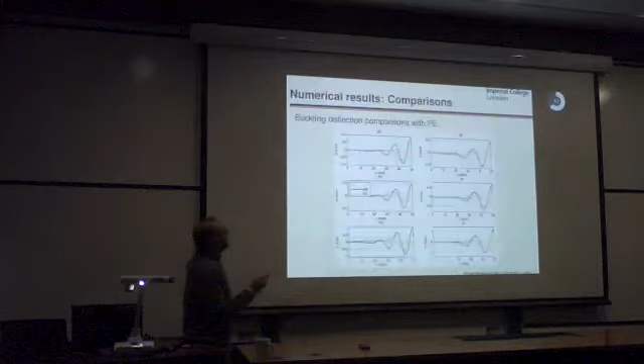Very, very good question, and it's not something I've looked at, but I know other people have. In particular for the cylinder, it's very much an issue, because there are so many modes kicking around for the cylinder. If you hit a cylinder, it may not trigger that mode - it may trigger a much higher mode, because instantaneously the load is much higher than the actual static load. What we're assuming here is everything is static - we apply the load, let it go, apply a bit more, and then stop. So the loading here is quasi-static, we'll assume. But if you hit something, instantaneously that load may be much higher, and then you might be triggering a much higher mode.

That's why, for example, if you stamp on a can, it doesn't trigger that mode - it probably triggers something much more messy.

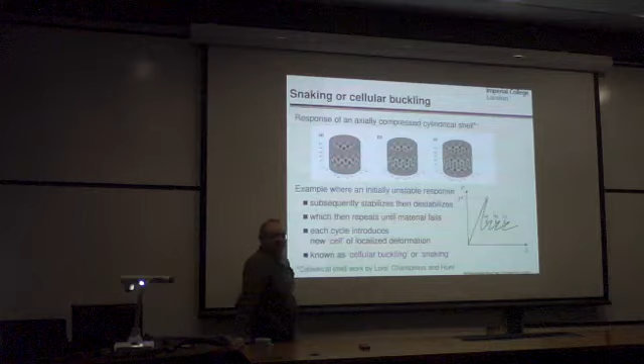Yeah, so I do a lot of impact modelling as part of my job, and one of the things we concern ourselves with is which mode has been excited under an impact, because if you hit it harder, or quicker at a higher rate, then you'll excite a mode of higher frequency, which can cause different buckling. Absolutely, yeah, absolutely.